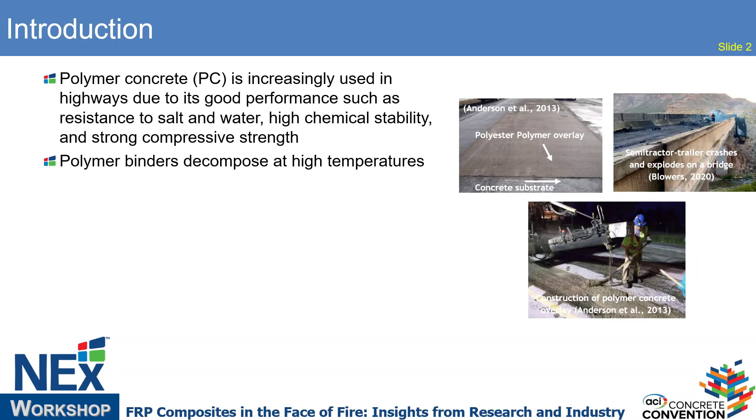Polymer concrete is increasingly used in highway structures as an overlay to protect concrete bridge decks, due to its good performance such as good resistance to salt and water, high chemical stability, and strong compressive strength. However, the polymer binder decomposes at high temperatures, while vehicle fires are prevalent. Even in 2019, there were more than 223,000 vehicle fires reported, and more than 180,000 occurred on highways.

Nowadays, the number of EVs has increased on the roadways. EVs have one problem: it's very difficult to extinguish them, and the fire lasts much longer compared to traditional vehicle fires. So there's an imperative need to study the impact of vehicle fire exposure on the polymer overlay, to guide future overlay material design and construction.

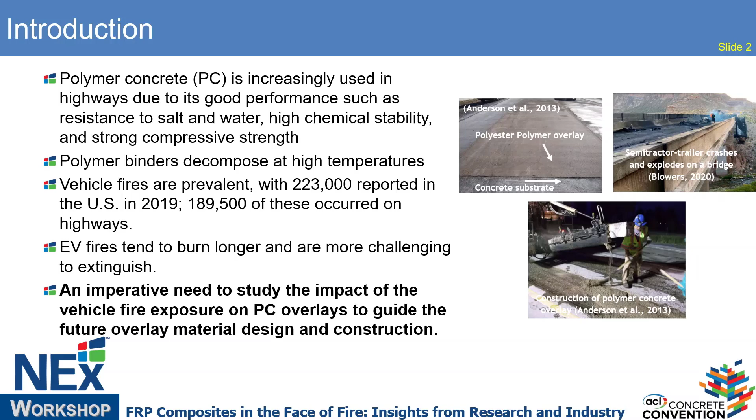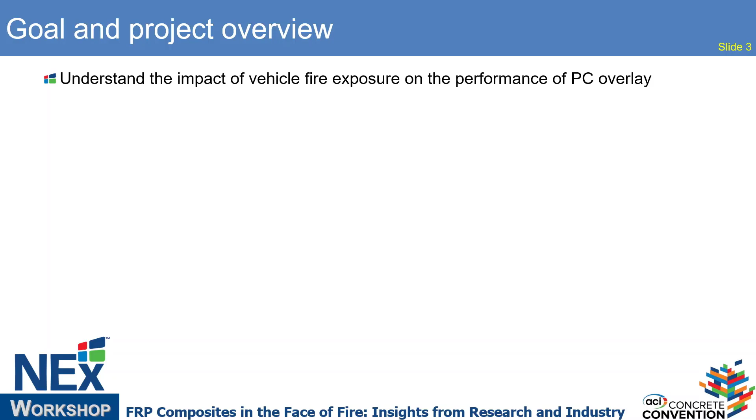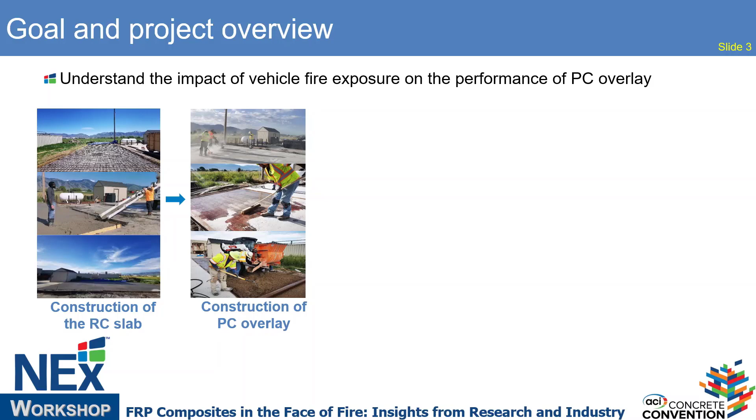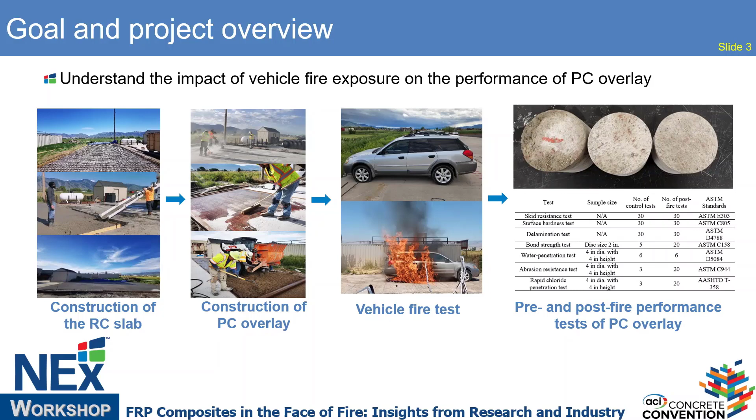The goal of this project is to study the impact of vehicle fire exposure on the performance of polymer concrete overlay. In this project, we constructed a reinforced concrete slab, and constructed the polymer concrete overlay over the concrete slab. We did a realistic vehicle fire test at the firefighting training center in Logan, Utah, and then did some pre-fire and post-fire performance tests of the polymer concrete overlay.

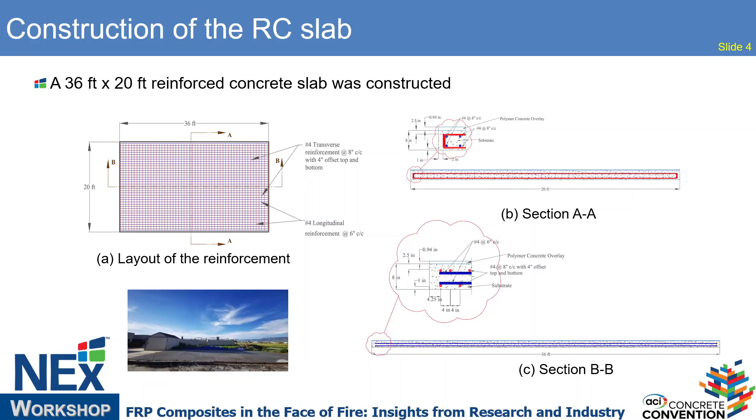This is a bridge deck. It's a concrete panel; we tried to replicate a bridge deck, and it is 36 feet by 20 feet. This is the overlay, and the polymer concrete we use is polyester polymer concrete (PPC).

Before construction of the overlay, we grind the concrete surface, then apply the primer coating, then apply the PPC mix, and after that apply the finishing sand. The thickness of the polymer overlay is 0.94 inch on average, which is greater than the minimum thickness required by the Utah Department of Transportation.

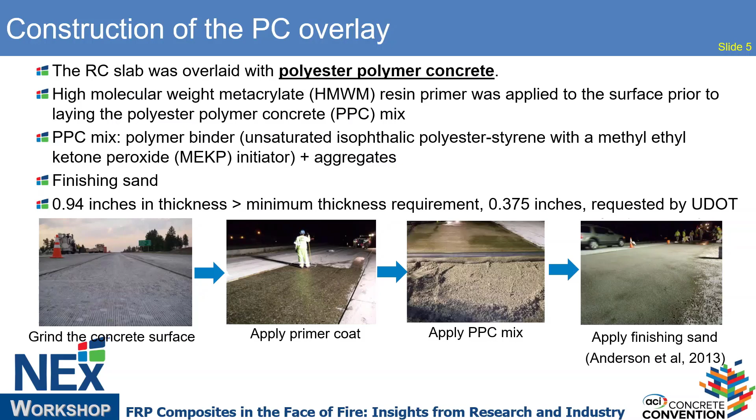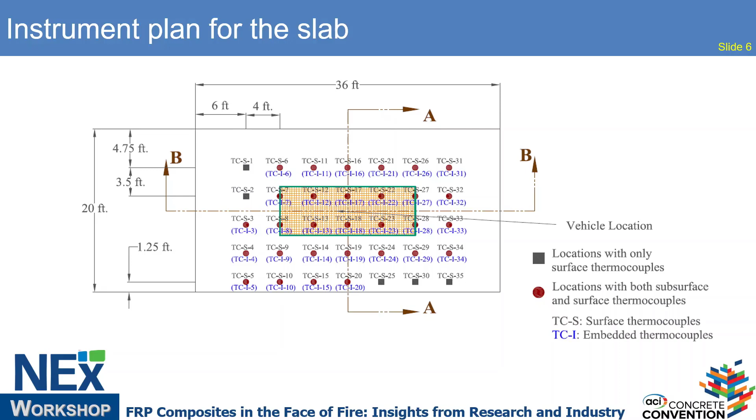This is the instrumentation plan for the slab. We attached thermocouples at the interface between the overlay and the concrete slab, and also attached thermocouples over the surface of the overlay. After that, we put the vehicle at the center of the slab, and those are the instrumentation plan of the vehicle fire test.

We have thermocouples inside the vehicle, around the gasoline tank, and below the vehicle. We also have a couple of cameras to record the burning process of the vehicle. We also have two heat flux sensors, one at the back side of the vehicle and the other at the side of the vehicle.

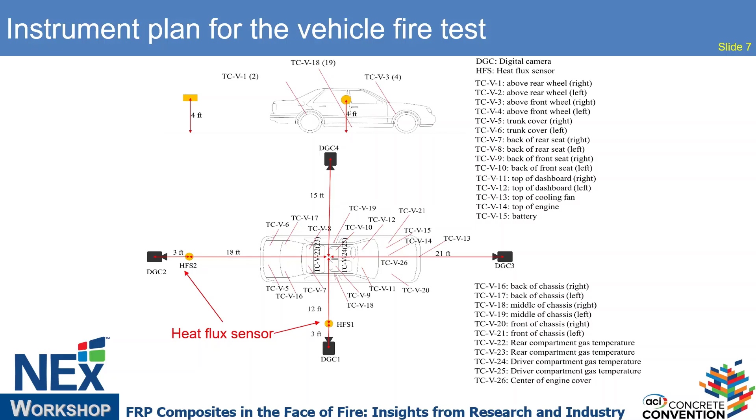At the beginning of the test, we left 2.4 gallons of gasoline in the oil gasoline tank in the vehicle, then poured gasoline leaking onto the slab and ignited it. This is basically to replicate the corrosion, vehicle corrosion leading to the gasoline tank, which leads to the burning of the vehicle, which is very common in real vehicle scenarios.

The vehicle fire burned for 225 seconds, and it stopped earlier than we expected because there was a jet flame from the gasoline tank. Under high temperature, the gasoline in the tank evaporated, and due to the high pressure in the gasoline tank, there was a jet flame, which is considered a safety issue, so the firefighters stopped the fire earlier than we had designed. But the total fire burned for 225 seconds.

In the test we can observe the direct burning flame contact of the slab, the overlay, with the flame due to the leaking gasoline over the surface. Also during the test, because the vehicle has a lot of plastic materials, those materials melt and fall down on the slab surface, which also has direct flame contact with the slab.

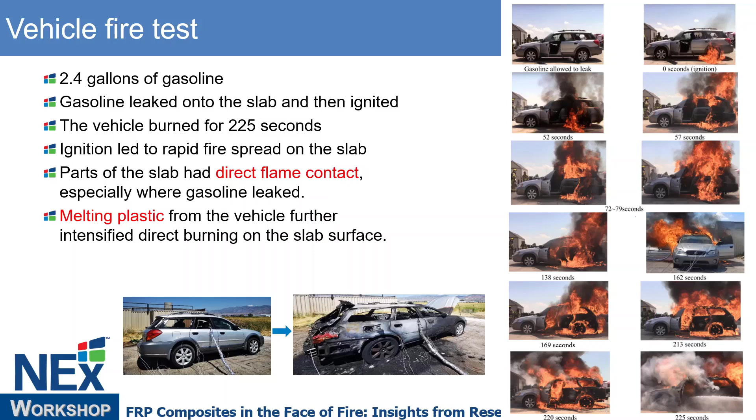This is the image shown on the right side, showing the process of the vehicle fire test burning, and the plot shown at the bottom shows the vehicle after the burning. It's basically completely burned, but the engine compartment was not burned, and the majority of the fire is at the back side, the passenger compartment, and the driver compartment.

So this is what we measured during the vehicle fire tester, and the left plot shows the heat flux we have measured. The maximum heat flux at the vehicle side is 47.5 kilowatts per square meter, which is relatively high. The other heat flux sensor at the back side of the vehicle measured 26.7 kilowatts per square meter.

So imagine if this happens on a cable bridge. There's a steel cable around the vehicle, and such a high heat flux will lead to some degradation of the steel strength of the cable, which may endanger the bridge.

We also recorded the temperature in the vehicle, and the maximum temperature measured inside the vehicle compartment fire is almost 1,200 degrees Celsius.

We didn't measure the external flame directly because it's an external fire, so the temperature would not reach 1,200 degrees. But from the literature, it should be around 700 degrees for the external flame. So if this vehicle is below the bridge deck, such a high temperature will cause issues to the steel bridge or composite bridge deck.

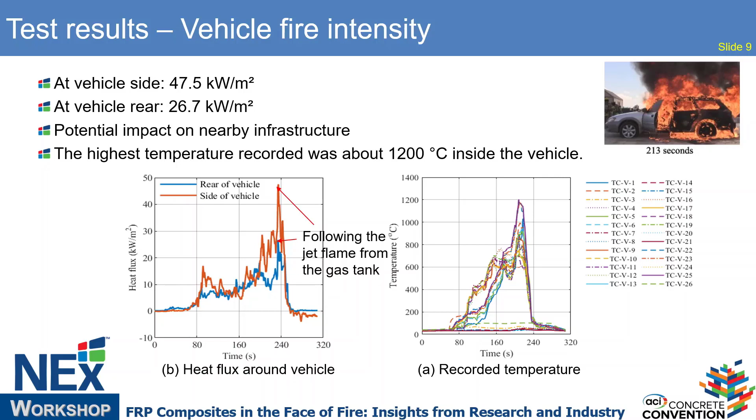So this is the temperature we measured on the surface of the overlay. The peak temperature we measured is 744 degrees Celsius, close to the vehicle, because the liquid gasoline was directly burning over the surface, causing that high peak temperature.

In the test, we measured two peak temperatures. The first peak is within the first 100 seconds, due to initial gasoline ignition and burning plastics. The second peak, around 189 to 247 seconds, is due to the vehicle fully igniting and the jet flame from the gasoline tank.

In this part, the area circled in the right plot is very close to the vehicle and was exposed to the highest temperature during the vehicle fire test.

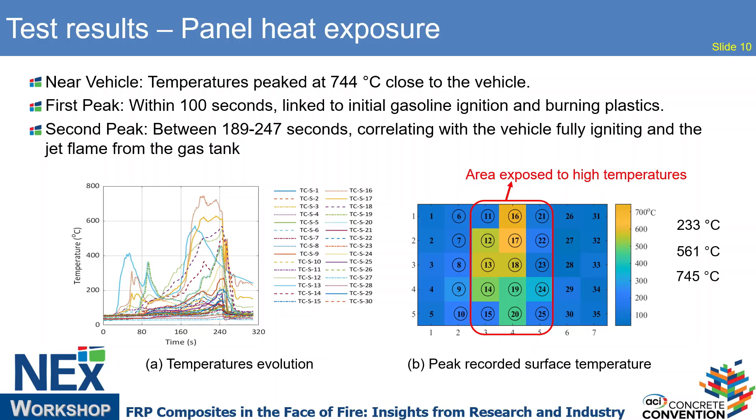This is the interface temperature we measured during the vehicle fire test, at the interface between the concrete slab and the polymer concrete overlay. It's still relatively low during the test.

One reason is that the overlay protection has relatively low thermal conductivity, which protects the interface. For another thing, if the vehicle fire extends further, like an EV fire, it can extend for more than an hour and be ignited again and again, so we can imagine the interface temperature would increase significantly with longer fires.

Although the maximum interface temperature is only 55 degrees C, the overlay concrete has a relatively large thermal expansion coefficient, which differs from that of the concrete substrate. So this thermal expansion mismatch may still lead to some delamination between the polymer concrete overlay and the substrate concrete.

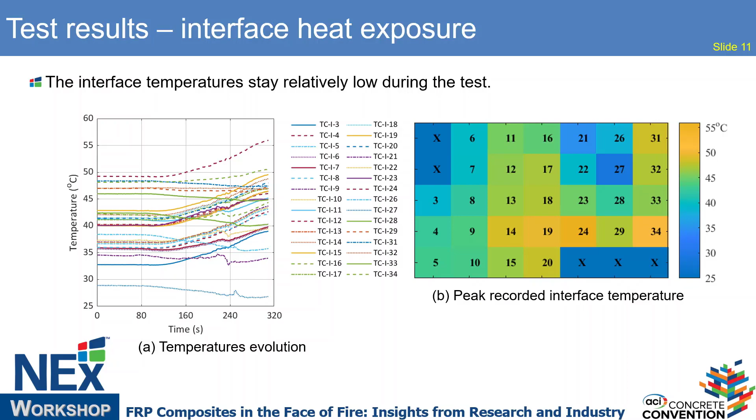This is the slab after the vehicle fire test, which we washed to make it look better. We found that the finishing sand on the polymer concrete overlay surface has peeling, due to polymer degradation and the water flushing.

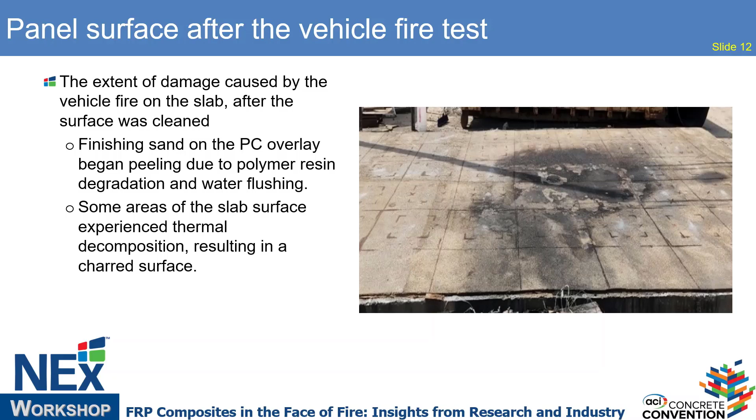Also, some areas, especially those under the vehicle, experienced thermal decomposition, resulting in a charred surface.

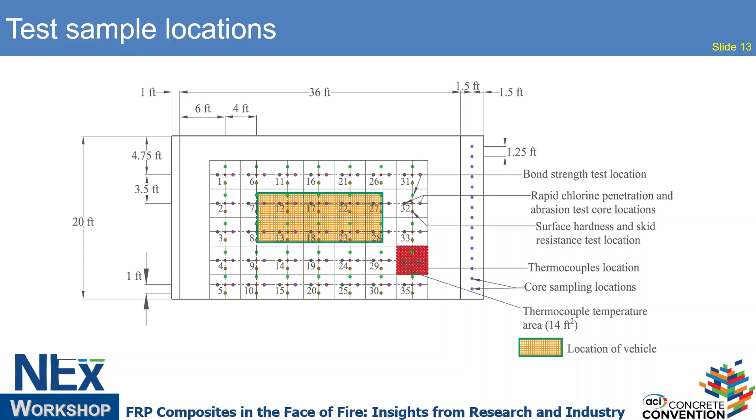After the vehicle fire test, we collected samples over almost the whole slab surface to do post-fire performance testing: measuring bond strength, rapid chloride penetration resistance, surface hardness, and we also measured delamination by IR camera.

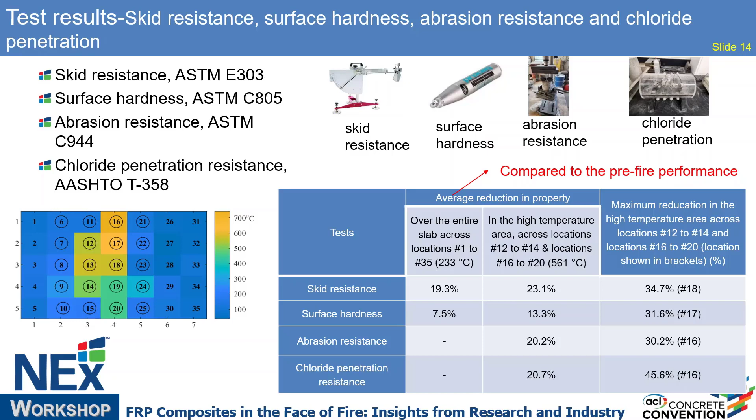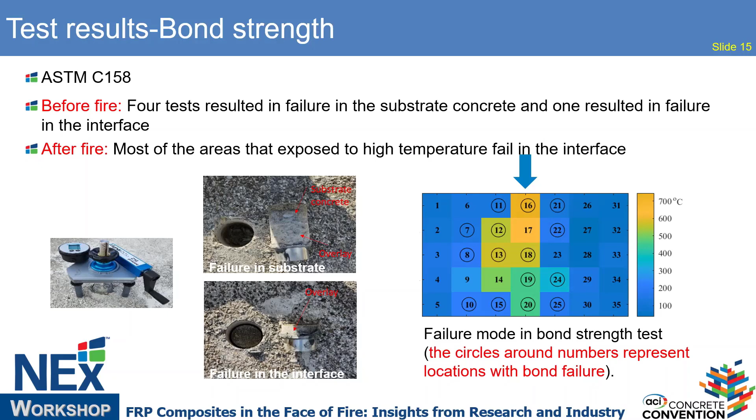And those are the results for the bond strength test. Before the fire, we did five tests, and 4 of them failed in the substrate concrete, which means the slab, the overlay, and the concrete have a relatively good bond strength between the concrete substrate and the overlay. After the fire, we tested the bond strength over the whole slab, especially in areas exposed to high temperature, and we found that the majority of them failed in the interface.

This is the water penetration, water permeability tester. Because the water permeability penetration test is very sensitive to the concrete composition, in order to reduce the uncertainty, we tried to test the water penetration for one sample before the fire and after the fire.

So instead of using the sample collected directly after the vehicle fire test, we collected a couple of samples before the fire, measured their water permeability, and then exposed those samples to a relatively high temperature. We considered 350 degrees C, and we also exposed some samples to 700 degrees C, which is almost the peak temperature we measured over the slab surface during the vehicle fire test.

We exposed those samples for 60 seconds, 180 seconds, and 300 seconds at a heating rate of 3 degrees C per second, which is the heating rate we measured during our vehicle fire test. We did this for samples before and after the fire, and found that as the temperature increased, the water permeability increased significantly. Similarly, when the duration increased from 60 seconds to 300 seconds, the water permeability also increased. For example, if the sample was exposed to 700 degrees C for 300 seconds, the water permeability increased by 370 percent.

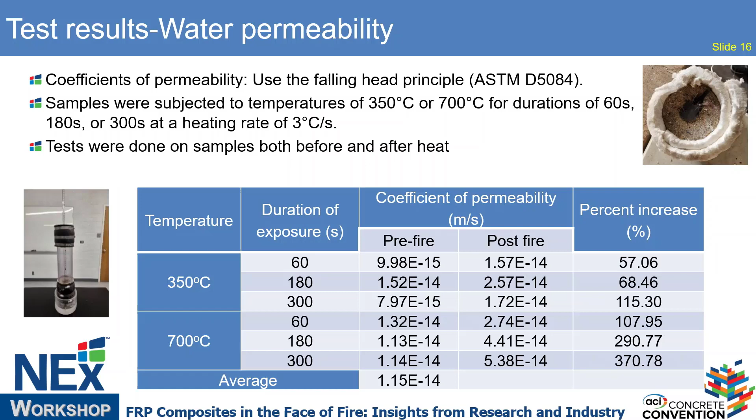So those are the delamination tests. We used an IR camera to capture the slab surface in the afternoon during the summer. Before the fire, we took thermal images over the whole surface, and we did similar work after the vehicle fire test.

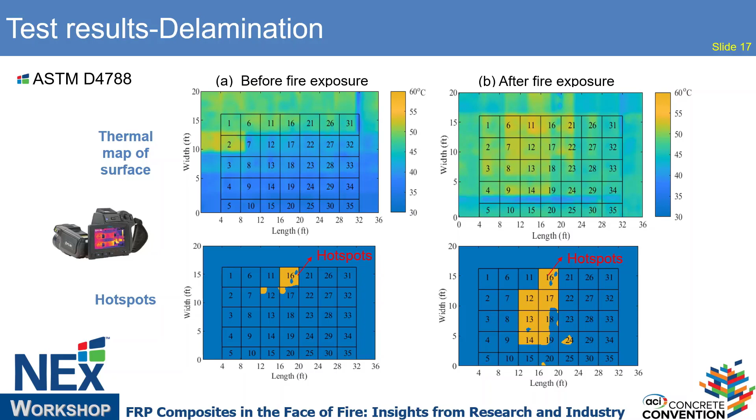We found that even before the fire test, there were some hot spots, but only at location 16. After the fire test, especially in areas exposed to high temperature, a lot of hot spots were identified. So this is the conclusion for this study.

This study explored the effects of vehicle fire on civil infrastructure, especially on the polymer concrete overlay for the bridge deck. We conducted a vehicle fire test on a reinforced concrete slab with the PC overlay, and the maximum temperature reached was 1,020 degrees C for the vehicle.

This is a compartment fire inside the vehicle. Over the surface, the maximum temperature we measured is 745 degrees C. And the highest heat flux around the vehicle was 47.5 kilowatts per square meter.

And this leads to some issues. This high heat flux from the vehicle fire can damage surrounding infrastructure, such as cable bridges and cables for steel bridges. For example, if the fire happened in a wildland area, such a high heat flux may potentially ignite it, leading to wildfires if the bridge was in the wildland area.

Also, the rising number of EVs increases this risk because they cause long-lasting fires. It's difficult to extinguish them with water, and sometimes after extinguishing, the battery thermal runaway will begin again, so the fire will start again, ignite, extinguish, and ignite again. This leads to a relatively longer fire period compared to traditional vehicle fires, which will definitely have significant potential damage to civil infrastructure.